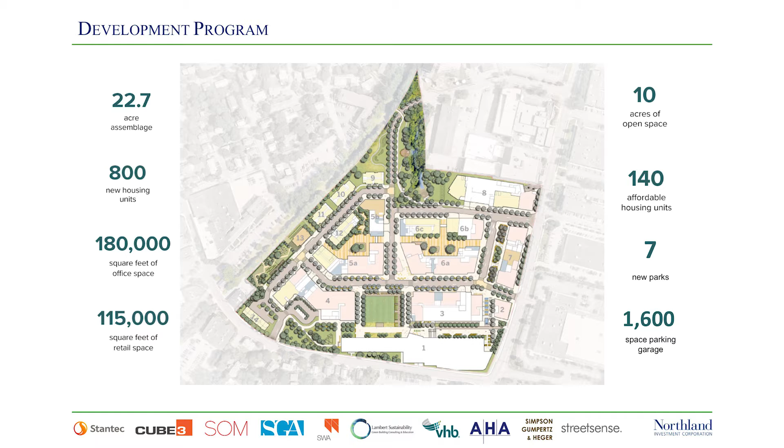And the project is about 35.2 units per acre, which makes it the 6th or 7th most dense project in Newton—a concern, but it's really not even the densest project in Newton.

Of the 22.7 acres, 10 acres or more than 40% of the site is open space. There are 7 parks, including the Village Green.

There's a community splash park and community playground here. This was going to be a community building, but at the last moment of negotiations, the city didn't want a community building—they wanted the splash park and then a neighborhood park. So we didn't argue.

And this area represents a restoration of the South Meadow Brook, which is exposed. It's actually encased in a culvert as it comes through the site and goes underneath the Saco Pettee Mill here. One of the things—I don't know if you can notice—but the Saco Pettee Mill will have a new entry, a glass-enclosed entry here off of the village green.

We're only providing one parking space per apartment unit, whether it's a studio, a 1-bedroom, a 2-bedroom, or a 3-bedroom, which in this market is unheard of.

So here's the real focus of today's discussion: our sustainable design strategies, of which building electrification is really only part. The very nature of the project—a mixed-use, walkable, village-oriented residential, retail, and office neighborhood—is really the overriding sustainability strategy we pursued.

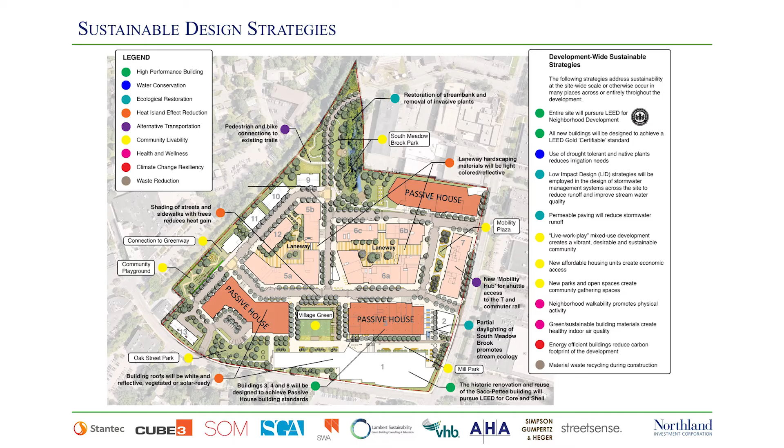These are the smaller, more traditional townhouse-type projects. You can see here the Passive House buildings in the darker color, and this is the core group of the additional 5 buildings being analyzed. All of our buildings will either be Passive House certified, LEED for Homes multifamily certifiable, or both. 3 members of our team have become Passive House certified, and 1 more is taking her training next month. We expect more to follow.

So this is a view of what the project will look like when it's completed, if we get approved—the Saco Pettee Mill, the Village Green. This is one of our Passive House buildings, this is another Passive House building, and this is another Passive House building. And this is really the cluster of 5 buildings that are being analyzed right now.

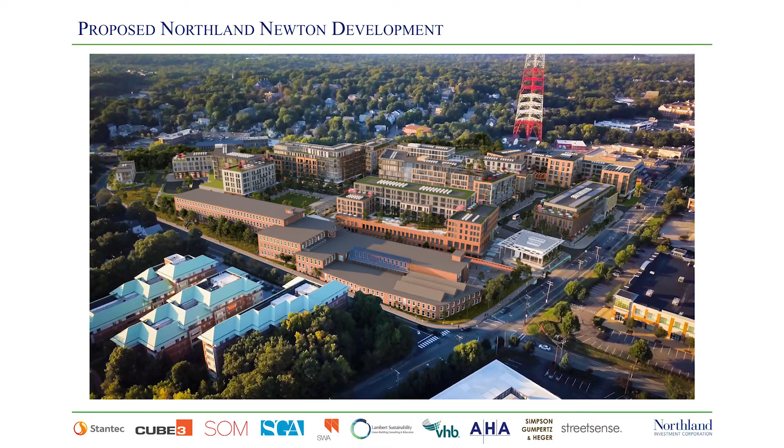So now I just want to summarize what we see as the challenges. Not barriers, but just challenges that we all need to be aware of. Some of them have been discussed today, so I'll try to do it in negative minutes here since I'm out of time.

Rapidly evolving green building systems. There's so many systems, it'd be nice if they could be coordinated, particularly with the energy code. There are two different Passive House systems that argue with each other. LEED is constantly evolving. There's LEED for new construction, LEED for multifamily high-rise, mid-rise, and they're even thinking of changing that. There's the energy code, and now local ordinances trying to legislate green building standards, but not all of them are as reasonable and well thought out as Brookline's.

Experience and expertise. This has been talked about a lot. We simply need more experience and expertise in design and construction. There's just not a lot of people doing this. There are only two contractors that we're aware of with direct experience at the scale we're dealing with for Passive House, and only one of them has done a market rate project. Mass Save, however, has launched programs to help alleviate these shortages with multiple training programs and in some cases funding assistance.

Now, here's the bad word: gas. So far at the scale we're developing, we just can't find a feasible electric solution for domestic hot water. So what we need to try to do somehow is find a way to future-proof our buildings so that when electric becomes feasible, we can then convert. But again, it's still open territory. How do you prepare for that?

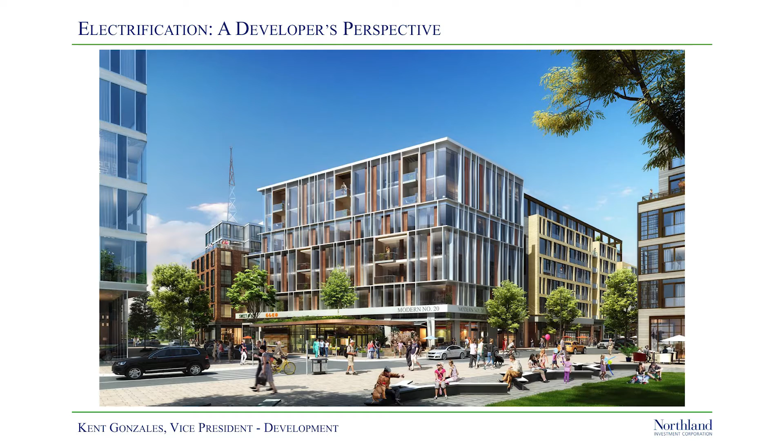So since I've been told to stop about four times, I'll conclude by saying: from our perspective, the path to electrification is the path to take, but with our eyes and our team's eyes wide open on how we can really effectively and feasibly do it. But we are committed. So thank you very much, and sorry for taking too much time.

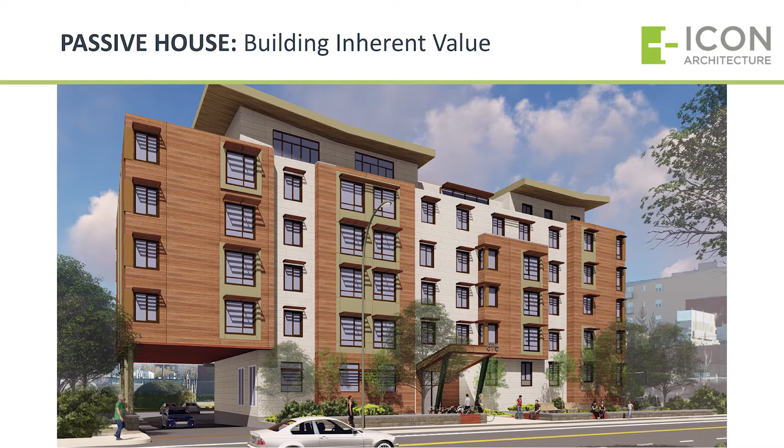I want to talk about Passive House, from my perspective and the perspective of many, as the perfect baseline for future electrification and for net zero. I'm not going to delve deep into the standard—I think I'm talking to a very experienced audience. So my goal today is to talk about how you actually execute it, because it's one thing to design it and another thing to get it built.

This is a picture of FINCH in Cambridge. This is where it was probably two months ago. It's well under construction, getting ready to be occupied in April—98 units of affordable housing, intended to be Passive House certified, pending blower door testing in a few weeks.

There have been a lot of reasons lately why Passive House has been moving quickly in Massachusetts, and they're all very exciting on the incentive side of the equation. Thank you to Mass CEC, if you're in the audience, for focusing on the affordable housing equation, and thank you to the EEA and the Mass Save program for bringing out these incentives at the end of last year. We are seeing a surge of folks looking to understand whether it's feasible and to at least take that first step of a feasibility study. And frankly, that's kind of a no-brainer from my perspective. There are lots of policy shifts moving us in the right direction—not quickly enough.

This is what our energy model tells us we are going to achieve at FINCH. It obviously has some assumptions baked in, a lot of those are in the design. How much insulation do we have? What are the U values of our walls, windows, et cetera? What's the occupancy? All of that data. Those are things we've baked into the design. Some assumptions always on plug loads and hot water usage.

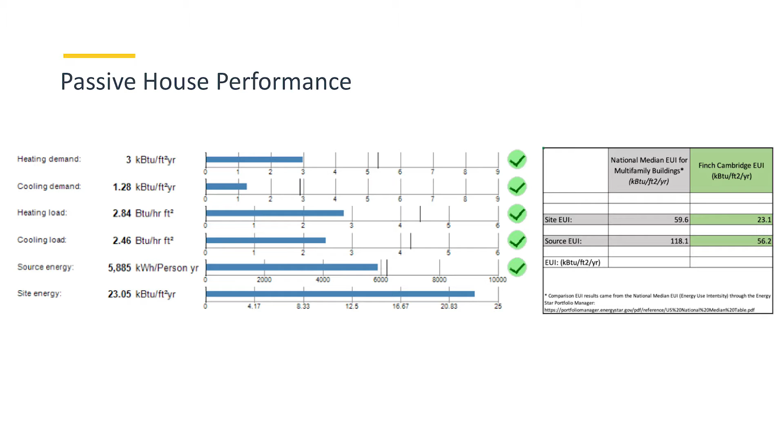The one thing that's also intended and assumed in the model is a certain infiltration rate, and that's the one thing we know we have to test for to verify that we've executed properly. And that's really where I want to focus our conversation today.

In my view, the building industry is in a crisis in this country, and we are not attracting talent. We are not attracting young people into the trades because they don't see it as a path toward a strong future. And that is a true mistake, because it is so much fun.

We all started with Legos, so everyone knows building is fun, and it's so flexible. And truthfully, I don't look at climate change as a crisis. I look at it as an amazing opportunity to single-handedly solve multiple problems, from social equity problems to climate justice problems to our environmental crises, and ultimately to help us lift one another up and solve this crisis together so that we rethink how society is functioning. And I think the building trade is a huge piece of that equation.

So what did we do with a builder who had never designed or built a Passive House before? Because as was mentioned, there are only a handful in the state who have done so. One of those was on our first Passive House project, the distillery. And a lot of the ones who build at scale are really new to this, so there is a learning curve. We have every ability to do it, but we have to think about how we communicate and how we collaborate to make it an effective process.

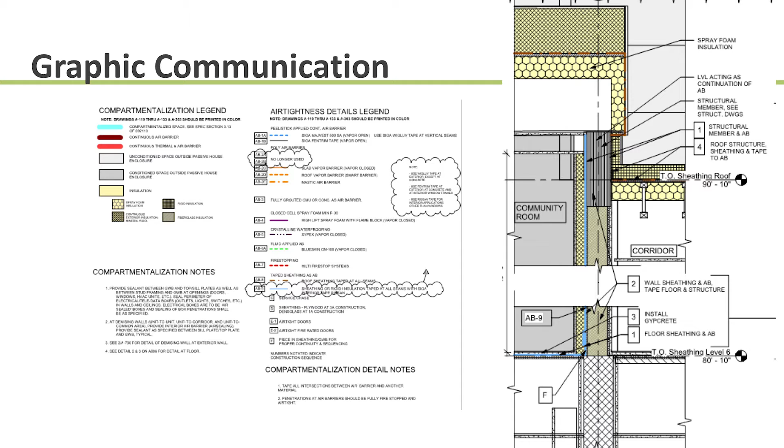We spend a lot of time thinking about the sequence and which thing has to happen first to make sure we can get that continuity of our air barrier, of our thermal envelope. But, you know, for many people looking at this, it's not gonna be crystal clear.

There's another piece of the equation, and that's what happens when you're out in the field and you start to see things coming together. NEI is our contractor, and they have been a phenomenal partner, a true partner. We instituted at the very outset of the project, in addition to that 3-week look ahead that's sort of traditional in a construction process...

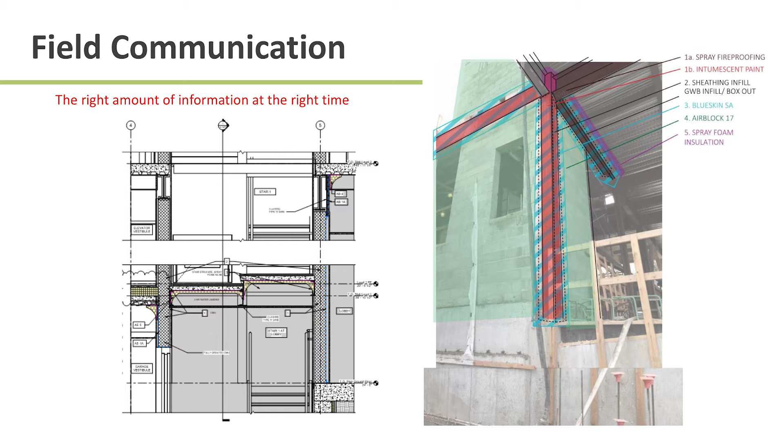...some time in advance of our job meetings where we would look at that look ahead, understand what Passive House specific details were coming down the pipeline in the next few weeks and which trades were going to be involved. We would get those foremen into a room with us and the GC, and we would look at those details.

And it's a humbling experience when people who actually build the details look at the architect's details and say, you can't build that. So it was a true iterative process to reinvent detailing based on what we're seeing in the field, based on the sequence, who's got to get in there first, who's got to get in there second.

I can't figure that out on my own sitting in my office. That's a team effort. We were lucky to have NEI on board during the design phase to help do a lot of that work with us early. But there's nothing like standing out on site and looking at a detail that's two-dimensional in our drawings and way more complicated in reality, and thinking through that process.

Building is a craft. It should be considered a craft. And if we begin to value it again and to treat the laborers and the trades with the respect they deserve to create the future that we're looking for, then we need to bring them into the picture and really acknowledge their value. I think that is a huge mind shift we need to all start bringing into our conversations.

So I made it a point on this project to get to know the name of all the key foremen and all the key people who were involved in the things that actually make this a passive house. This is Caio's team on the carpentry side installing our air barrier.

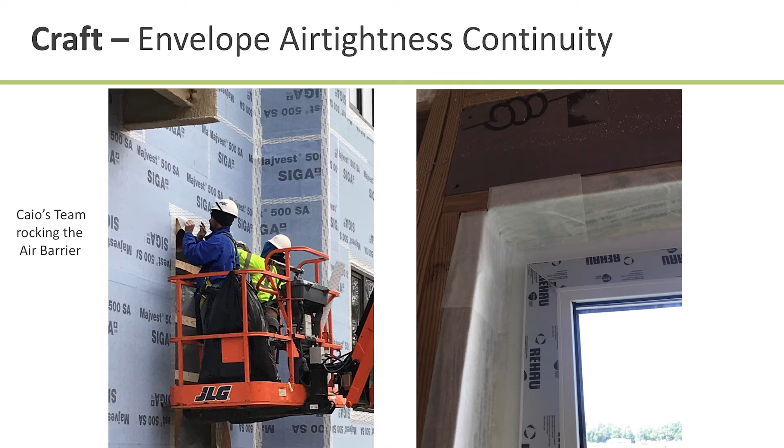We do mock-ups for window mock-ups and general mock-ups on all of our projects to make sure everyone understands how the details are going to be executed. An air barrier is not that hard to install on a flat surface with tape. It's a lot harder to install at the windows, at the doors, at the transitions. So our whole team, including our verifier, our QA/QC folks, our commissioning, our envelope agent, sat for several hours as we watched Caio's team installing that first window.

It was painful. It was not easy. It took a lot of time. And in the end, our verifier took us aside and said, Michelle, if this is what it's going to take on every window in this 98-unit building, you're never going to get there. You're never going to get it in time, and it's not going to be the quality you need.

So this is the air barrier we're using. This is not the air barrier we started with. I think it's really important to see it in process, and I can tell you that they love this product, and they are feeling really excited about how excited we are.

We also have to have our eyes on things. Different teams come on and don't necessarily get the benefit of the chain of communication that happened prior to their arrival. So we can clearly see there's a little too much air there on our exterior wall for an airtight envelope, not to mention insulation issues. So you've got to kind of keep on that.

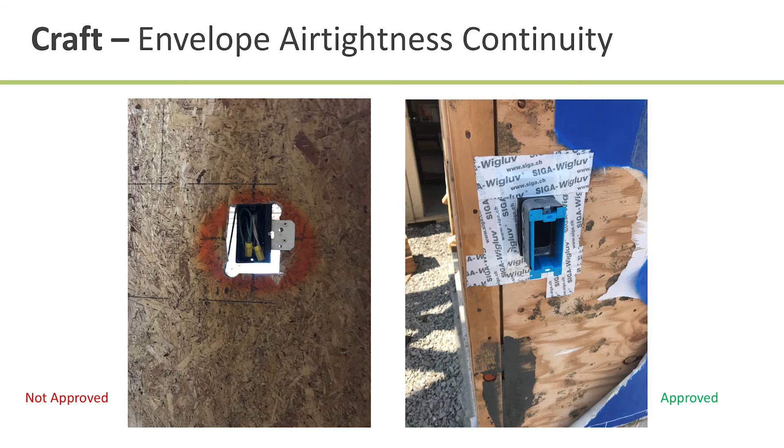Similarly, our QA/QC team was very focused on our insulation, making sure it's not pinched and it's really filling the cavity, and we're getting, again, the continuity that we're looking for.

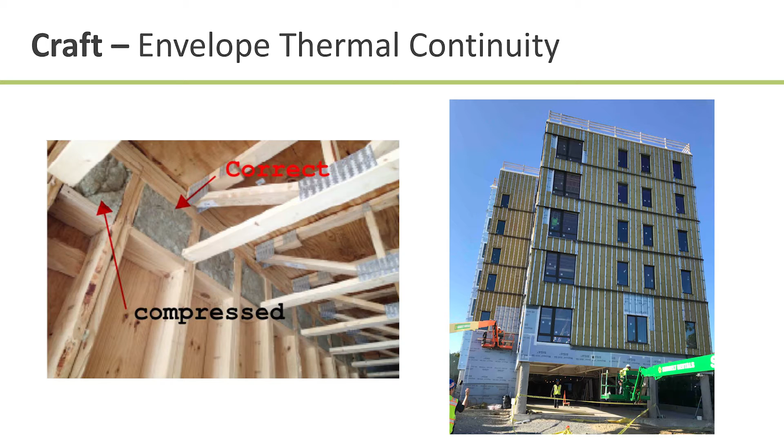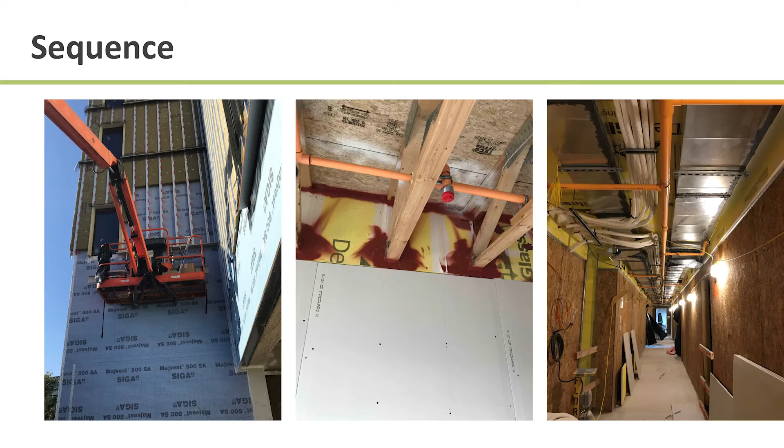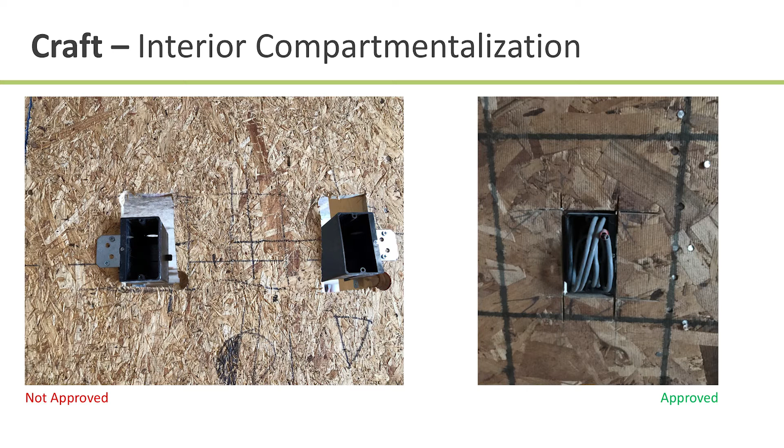Sequence matters. It's really, really important, and it gets way more complicated than we sometimes realize in our office. So it's important to talk through that. And just to note that airtightness is not just about the exterior envelope. It's also about compartmentalization, particularly in a multifamily setting. So different trades, working on the inside versus the outside, didn't get the memo. We had to have the same learning curve a couple of times.

This is Ian. Ian was responsible for making sure that all of our penetrations in the slab over our totally unheated garage were airtight. We can see that the first try was not optimal, but Ian is a quick learner, and all he needed was to be shown how to do it right, and he was able to execute that beautifully.

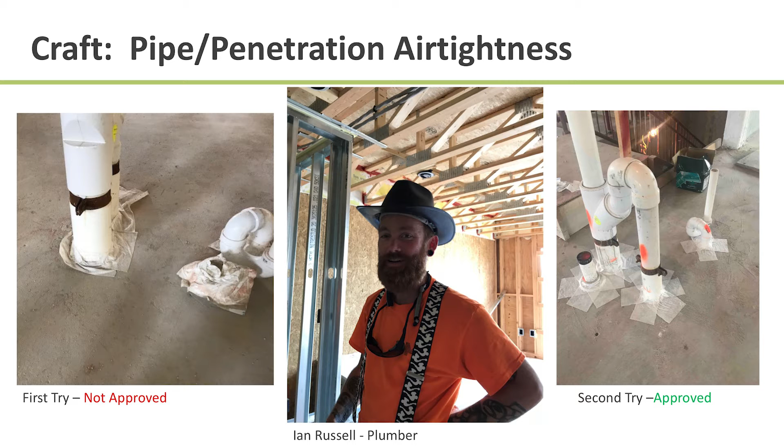Same thing with the insulation. How are we insulating around that? You've got to think through this. What's going on around the fireproofing? What's going on in these gaps?

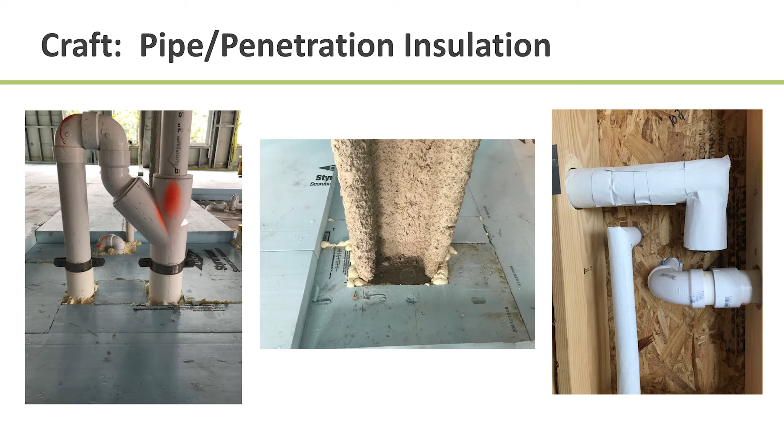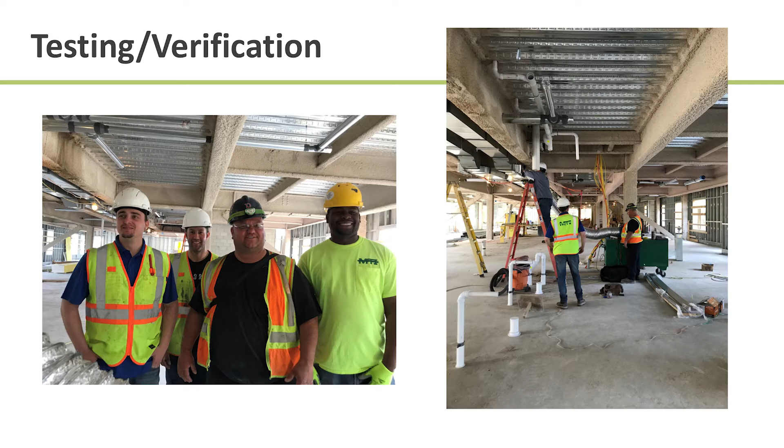That's Eric's team. He is in charge of the MEP and all of the duct work that's going in. Eric doesn't need to know about passive house. He just needs to know that his duct work needs to be tight. That's his job, and that's what we're expecting him to do. So it doesn't have to be a complicated conversation. It just needs to be clear about our expectations and the fact that we're going to be testing to help catch problems early and support him in achieving what we're looking for.

Always great to see that it does make a difference. This is from the inside without continuous insulation on the outside, and now with continuous insulation.

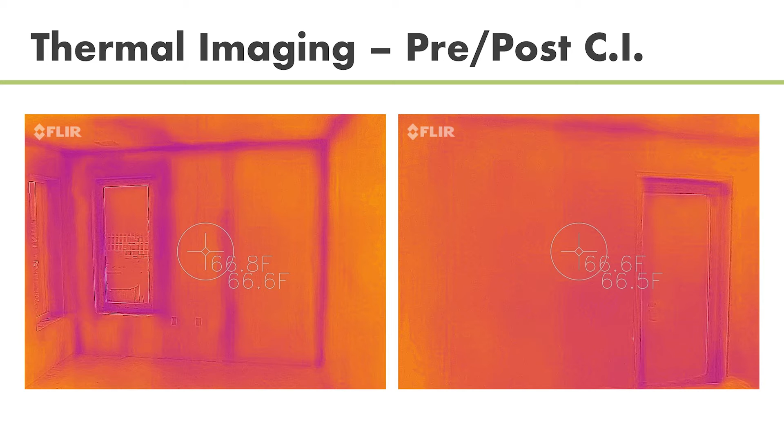And finally, it's just really important to note that this is a team effort. It really, really is. It's certainly changed a lot in the time since I began working in this field. And those teams take a lot of expertise and a lot of collaboration. So no one is alone in this process if we really look at ourselves as collaborators and consider, again, the craft of building. Thanks.

And now I'm going to introduce Jacob Knowles. Geez, I have to go after the Passive House project. You're not going to like this next one.

So you can see there's a lot more glass on this building. This building has a long history. It started many years ago when KPMB, the architect on the job, won a competition to work for BU, and it was at the president's level where they were inspired by this iconic architecture that was going to be a beacon for the future of BU's computational and data sciences program. And so from the very beginning, this was a glass building, and that was non-negotiable.

The project then went on hold awaiting fundraising efforts and internal approval process within the university. And when it came back to life, BU had really transformed from maybe a little bit more of a laggard in the climate action front to a truly inspiring institution that has made huge headway, including entering into a long-term power purchase agreement with a wind farm developer in South Dakota.

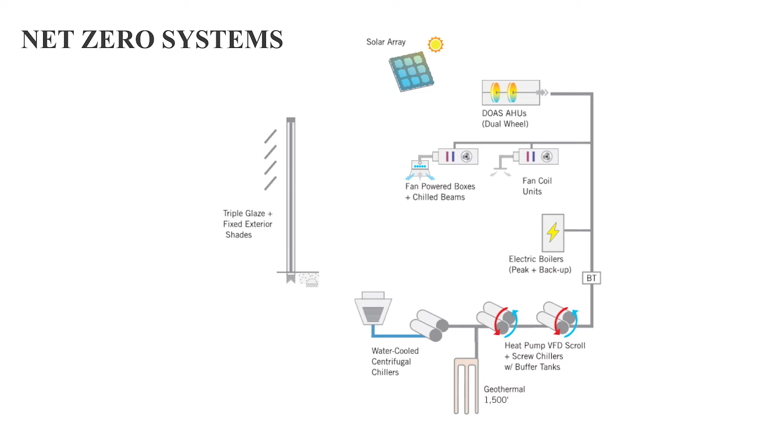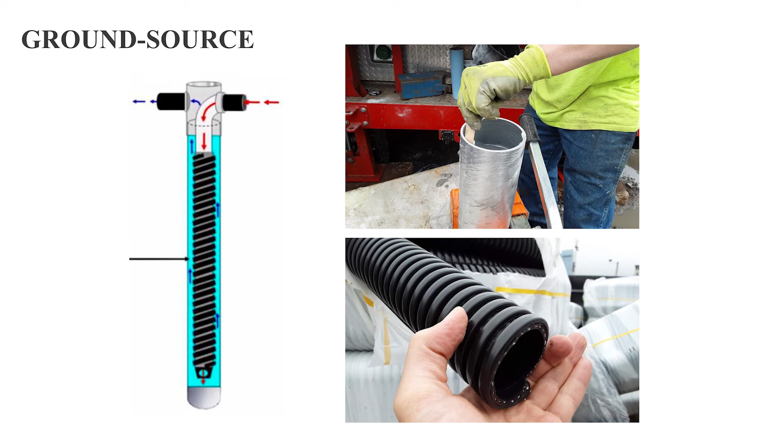So in this case, we're not going down 500 feet with our geothermal boreholes. We're going down 1,500 feet, so 3 times as deep. And we're using a proprietary concentric pipe product rather than the typical U-bend. This sends the water down inside of the inner pipe, which is insulated, and then sends it back up the outer pipe, which is then conductive to the ground. So you get even better performance out of this system than a conventional one, and it can handle that pressure of that deeper borehole.

The reason why we went so deep is because we needed to engage with the ground to have enough heat exchange, rejecting heat in the summer, pulling it back out in the winter to heat the building with our heat pumps, rather than using fossil fuels. The reason we had to go so deep is because we had very limited space to work with, and we still needed a large amount of mass of rock to engage with. There's just a small alleyway behind the building and a pocket park, and we actually put 3 of the boreholes beneath the footprint of the building itself. So in all, we have 31 boreholes at 1,500 feet deep each.

So this is all projected energy performance. The building broke ground in December, so obviously we'll have to see how it performs in the real world. But a conventional design, you can see code minimum at the time this was permitted is on the left. Our proposed design, which again, if one reduced the window to wall ratio, you could get even better.

They're also installing solar on campus. A portion of that solar will be allocated to this building. That gets us down to the green bar. And then with the South Dakota wind energy offset, that's how we're getting to carbon neutral. And there is no gas connection to this building. There will not be any gas consumption.

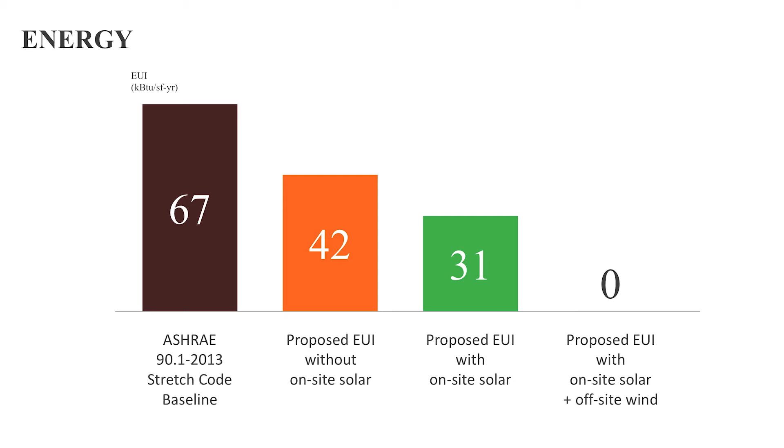And what did it cost? It cost less than 1% construction cost premium. As I mentioned before, smaller systems, smarter systems, saving on space—you add up those two savings and it pays for the geothermal, which is the one major cost premium. Overall, roughly balancing out. This was one of the projects used as a case study in the USGBC Massachusetts, now Built Environment Plus, report on the cost of getting to net zero, and the payback is less than 2 years. So it meets pretty much anybody's pro forma, even a developer type of pro forma from a cost effectiveness standpoint.

Byggmeister is a residential remodeling firm. We work on existing single-family and small multifamily homes. We don't do any new construction except for the occasional addition. How many people here live in a single-family or a small multifamily 2 or 3 unit building? All right, these 10 minutes are for you.

I was thinking during the presentation at the beginning with Jesse and Lisa, you had talked about the questions you got—what does this mean for me, what does this mean for my home. Byggmeister's based in Newton. I live in Newton. I think our building stock profile is probably fairly similar—we have a lot of existing small single-family, small multifamily housing stock. And that accounts for about a third of our overall emissions in Newton, so we really have to address these buildings.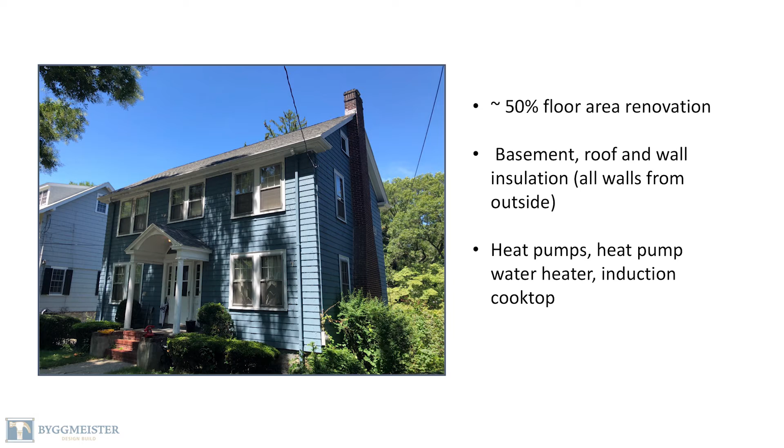This is a house where work is just wrapping up, in Jamaica Plain. The renovation scope would have fallen below that 75% floor area threshold—in fact, all of the projects we did in 2019 would have fallen below that threshold. This was a house that hadn't had work done in decades, so there were a lot of opportunities on both the envelope side as well as on the mechanicals. Old boiler, no central heating, very old hot water heater—so old that our plumber actually took a photo of it. You don't encounter those every day. There were a lot of opportunities.

The project is now nearly what I'd call a near whole house conversion. So we have heat pumps for heating, a heat pump water heater, induction cooking. There is an existing gas dryer that the owners will replace with electric when it finally dies. This project, we considered—there's no cooling. The owners really wanted to add cooling, and that's one of the things that when we're thinking about converting homes can be sort of a trigger, pushes people over the edge. So they're going to do a heating system upgrade and add cooling. From a first cost perspective, once you're there, a ducted heat pump, or a combination of ducted and ductless, is not going to be all that much more. So that really put us over the threshold. Also, the Home MVP program, a pilot energy efficiency program running in parallel to Mass Save right now, provided significant incentives for the conversion to heat pumps that helped make that project possible.

This is a house in Brookline that was completed in 2018. Again, the renovation scope would have fallen below that 75% floor area threshold.

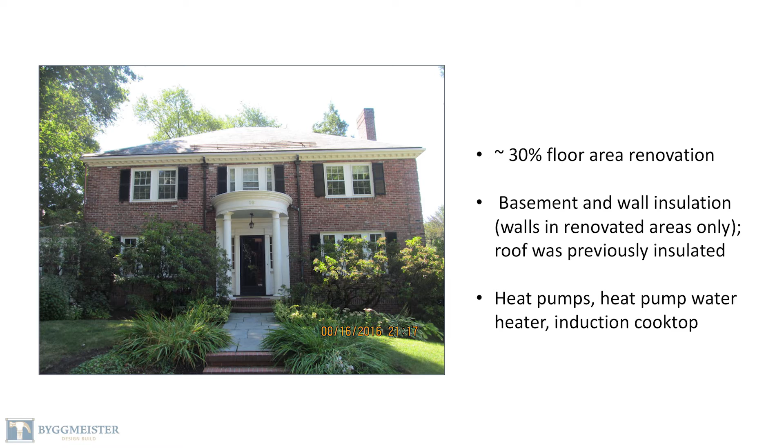This project was going to start off as a partial conversion to heat pumps. There was an existing furnace and central air located in the basement, and comfort complaints, particularly during the summer, on the second floor. So the original plan was to install a ducted heat pump air handler in the attic to serve the second floor, taking that off the existing system.

Then about a month before we were supposed to start, their central air broke. That's what tipped us over, and this is a theme I'll return to: rather than floor area, what triggers all of our conversion projects has to do with the age and efficiency of the existing HVAC equipment, whether it's time to upgrade, or whether there are comfort complaints. Cooling, the lack of it or insufficient cooling, plays a role.

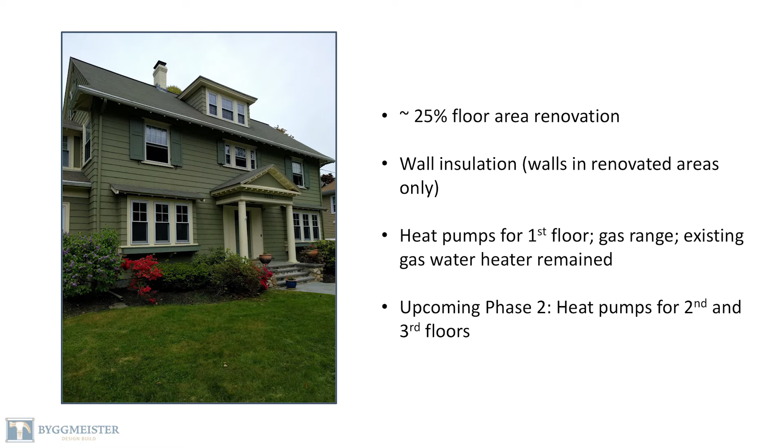This is a final example of a project that just finished up this fall in Newton. We've done a handful of whole house conversions, and the JP project and the Brookline project are two examples of homes that have gone all electric or nearly all electric. But we're doing more of what I'd call partial or phased retrofits, where it makes sense, given the homeowner's priorities and a long-term energy plan for the home, to implement a conversion to heat pumps over time rather than all at once.

For this project, there was a hydronic heating system and central air. Again, there were comfort complaints that the central air, located on the third floor, wasn't serving the first floor well. So as part of this work, we did ductless heat pumps for the first floor. As part of the planning, we discussed that the long-term goal would be to move over to heat pumps eventually, and it's looking like we'll complete that conversion for the second and third floors sometime this year. We did not remove the gas water heater, although we will likely do that as part of the phase 2 heating conversion.

These are very highly motivated homeowners from an energy efficiency and carbon perspective, but they insisted on keeping a gas range. And we do run into that.

This is a special case. This is a 3-generation house, and the grandfather, the parents of the wife, are Chinese, and the grandfather did all the cooking. Before we did this project, he was outside in the winter with his little wok burner setup, so the kitchen was done for him. We had to give him a very professional gas range.

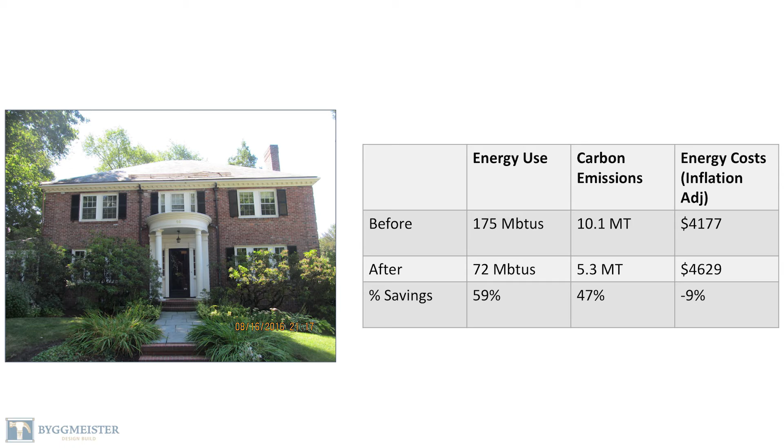Energy costs went up, and Jesse talked about that a little bit, the expectation that whether costs go up depends on what you're comparing things to. But in a retrofit situation, when you're going from gas to all electric, I'd expect costs to increase unless you are at the same time super insulating the house.

Lessons learned: electrification is practical for many more homes than gut rehabilitations, many more retrofits. It's not all or nothing, and in fact phasing the electrification often makes more sense. We're very lucky to work with people who take a long-term stewardship approach to their homes.

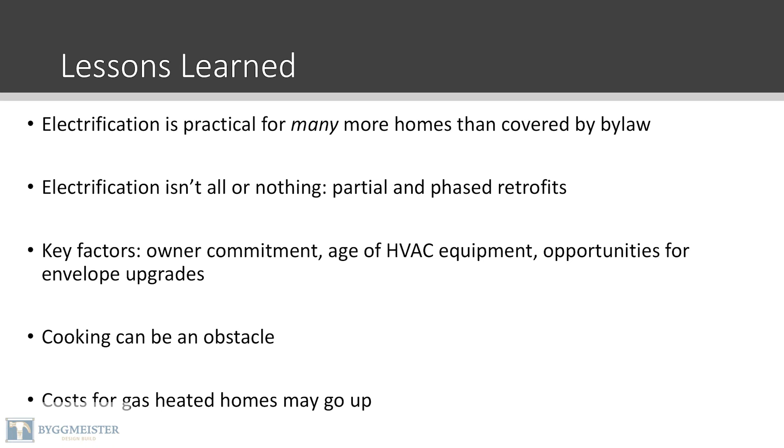Key factors, obviously in the absence of a mandate, are owner commitment. I should add, as I mentioned previously, that incentive programs can be a significant factor as well, as we saw for that project in JP. Also the age of the equipment and whether it's meeting people's comfort expectations. Cooking can be an obstacle, and costs for gas-heated homes may go up.

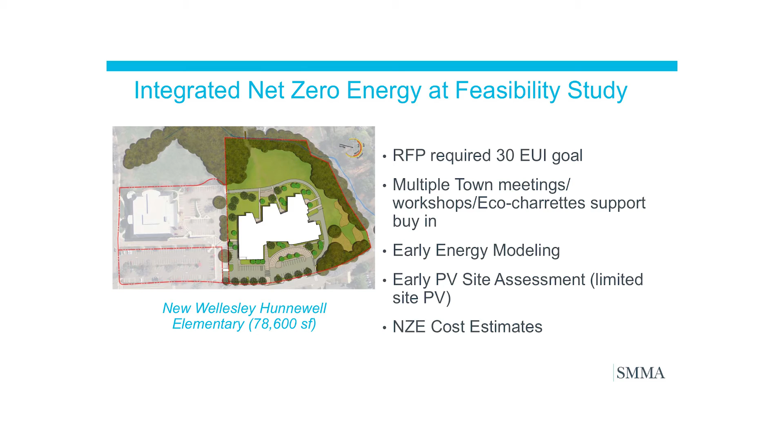From there, we engaged into a feasibility study process that has an educational scope, that has other elements. And the net zero energy was not something that was aside. That was something that was fully parallel to the process.

So town meetings were not specially for net zero. It was the feasibility town meeting that covered all the scopes, including net zero. We held many workshops. We did eco charrettes, which usually in a public school project, we only do a little bit later in the game.

Now, for us to do those net zero schools, we need to do this up front. So this was a precedent, and it set a precedent, actually.

One thing I want to mention is that particular school is not going through the MSBA process. It's going to be fully funded by the town. But the town has another project that's going through MSBA, so this set the template for the other project.

We did also a good amount of analysis, which I'll talk about in a minute. And what I want to mention is we partnered with Bill Maclay, Maclay Architects. Some of you may know Bill as an expert with net zero energy. Specifically, he brought his expertise for the financial analysis.

We did our own energy modeling, and it really provided a great complementary expertise to the feasibility study. So when you go through a feasibility study, you go through many, many iterations. You can go up to 20 or 30 different design options.

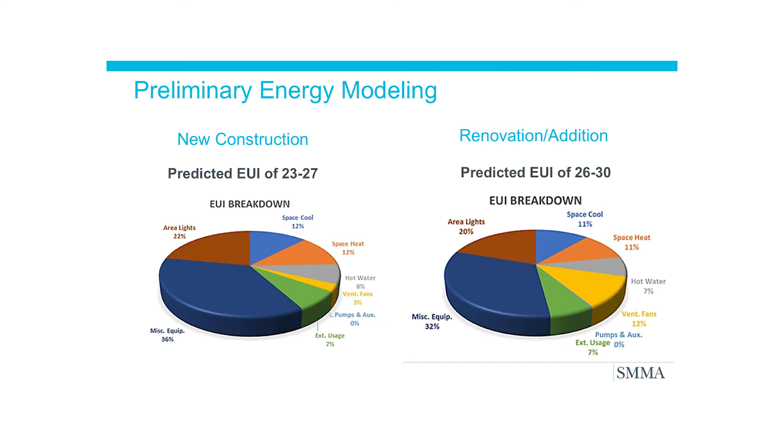We modeled between new construction and renovation addition. We do look at keeping the school if possible. In this case, the majority of the school was in bad shape. There was a small historical part, a small existing part that represented about 15%, where the town considered keeping it. So we modeled both options and both preferred approaches.

Even with the existing building, we were able to stay within and below the 30 EUI. That existing building, we could do retrofit to the roof, retrofit to the glazing. There were some limitations to the enclosure retrofit, which is why there was a little bit of a penalty between the two.

So this shows that ultra low EUI is achievable with these projects. This has a kitchen, a cooking kitchen, gymnasium, all the elements of a public school.

And then we went into a little bit more detail. We did really our due diligence because when we transition - and I think we're going to face this in this movement - to an all-electric system, all-electric heating and cooling.

We have generations of building owners, building managers, facilities managers that are used, a little bit like the plumbing and piping discussion that happened earlier, to the systems that are existing now. In some cases, they've experienced air source heat pumps or geothermal heat pumps very narrowly, and in some cases there was older technology that didn't work as well. So there's a lot of education to do there.

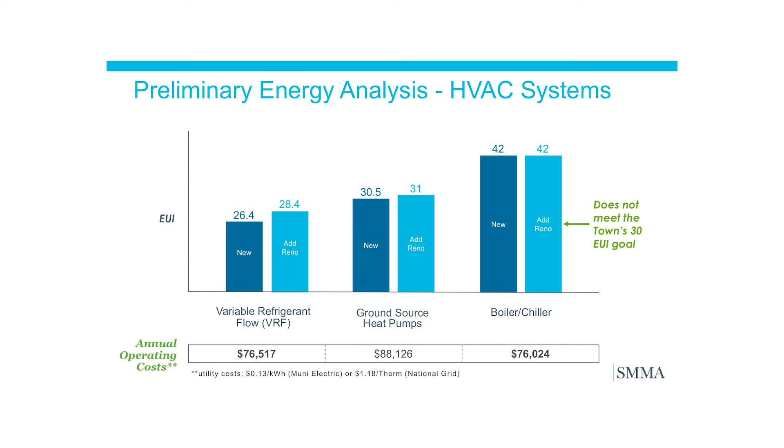So this building is obviously going to improve at many levels operationally. In terms of first cost, this is very early feasibility, but the incremental cost was less than 1% of the construction cost, and the payback was a few years.

Now, the bidding market right now is not on our side, and a lot of projects are coming back much higher, so that 1% could increase. But even if we go to 2 or 3%, we calculated that's still within a 10-year payback, and we're building this building for 50 years. Very doable, I must say.

We're designing a few other projects. I have about 2 minutes left, so I'll quickly show how feasible this is. We're about to start construction on a 165,800 square foot elementary school, net zero, with a 1.4 megawatt photovoltaic system.

And that's happening. Then one other school we did, not net zero, an MSBA LEED V4 Silver school, tight budget in a very economically challenged community. We did MSBA mandated building enclosure commissioning and were able to put in an air infiltration test, similar to what Passive House does, which cost around or less than $10,000.

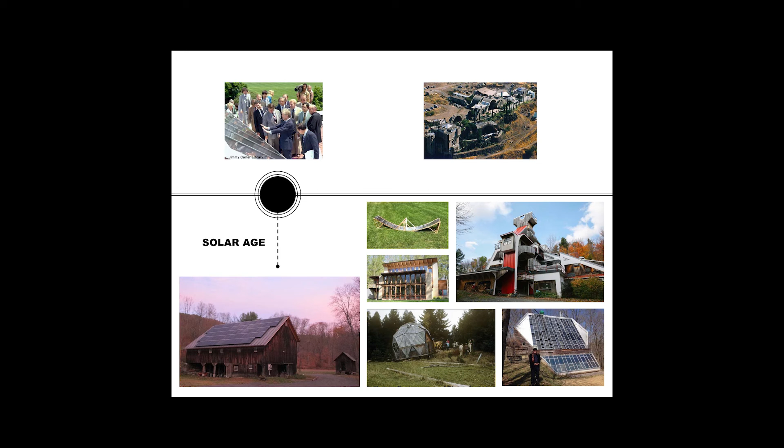People letting it fly, trying all sorts of things to get these buildings going, solar hot dog cooker, and Arcosanti. The stuff up above is aspirational, the stuff below is built things I have some relationship with, just to frame it all.

The lost years included me. There was a decade there where I wandered off and did a whole bunch of stuff. Reagan took the panels off of the White House. I eventually settled down, went to school, and moved to Boston to get an architecture degree.

At 93, I almost moved to Europe to work for a professor, Günter Behnisch, who changed the direction of my life by talking about modern humanistic architectural design at the height of postmodernism, and also relentlessly integrated environmental components and humanistic components into buildings.

So I didn't end up making that leap, but was partially involved in this building here. If you ever want to look at a historic, really green building, the IBN Forestry Institute in Wageningen, Netherlands, 1993, passively ventilated with these Dutch greenhouses.

These greenhouses covered interstitial spaces that were green, untempered winter gardens, providing passive ventilation into the offices. It had a stack effect going, and these gardens were purifying contaminated soils on-site, right within the green gardens.

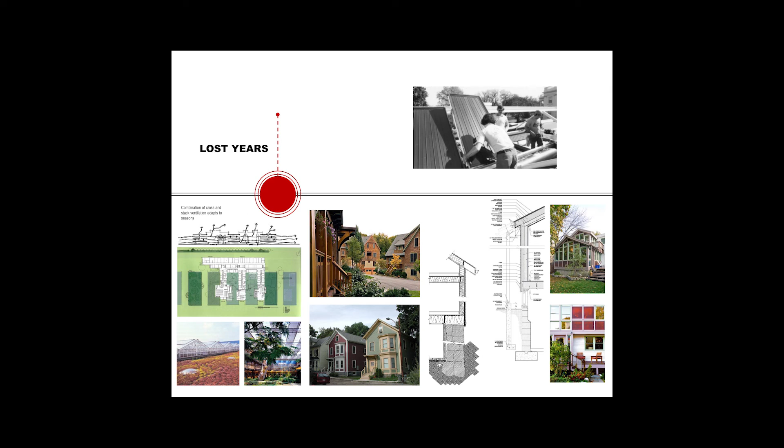It was interesting to be involved in the early transition from Energy Crafted, some people remember, to Energy Star, as far as an energy system for buildings. We did one for Energy Star, and then the Public Health Department in Boston got involved.

We did another one, this is early, probably 2000, that actually worked with public health to have no toxicity and have a different spec while still trying to meet these early energy notions. It was the first building where the transition between the two was a much tighter envelope, and we introduced ventilation.

It was basically better—extreme bath fans coordinated with timers—but it was happening because we knew we were making an envelope so tight that it wouldn't meet these public health criteria.

We went overboard. I don't think Jim is here, but Jim Newman—we worked hard on his house to make it this solar thing. The next round had this double wall, not nearly as much glass, so that was a good science experiment. It was an interesting process.

Energy became much, much more intensive, I would say. So after 2010, a little earlier than that, the Genzyme Center.

Behnisch came back over here. That was a great thing. Reinvented the office, whole different scale.

Very interesting throughout—we reduced the energy 38%, but ultimately the building has zero fossil fuel. It's from waste steam from the power plant next door, so it has steam heating and cooling. A lot of huge daylighting system that was probably over the top, even for the time.

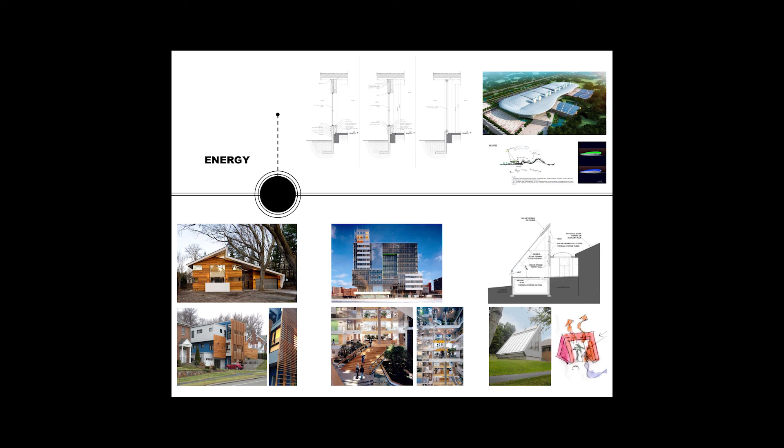In 2012, we did our first all-electric building house. These things were starting to always have exterior insulation, we were tightening up the envelope with triple glazed windows, really beginning to feel like we had the energy to a point where we could do this all electric.

At that point, this house suffered in the winter of 2015. The cold climate heat pumps were on the edge. It had some resistance backup in there, with no fossil fuel backup. They were brave.

The technology has moved, even in 5 years, significantly past where it was at that point, and it was a risk. This is the first zero energy project.

There's a little publicly procured greenhouse for Greenfield Community College, deep energy sort of envelope, only south and east glazing, a lot of work for stack effect and passive ventilation.

Huge array on the roof and back for powering it off. Pretty successful, pretty interesting, especially on public procurement, if anyone's aware of that. But aspirationally, doing some work in Asia that was fashionable—these high-paid competitions for high sustainable buildings.

Also got a very interesting high school project that some people in the room were involved with, which almost got to the finish line for renovating a high school to have 8 different facades so the kids could track the energy use of the different building systems, down in Dighton Rehoboth.

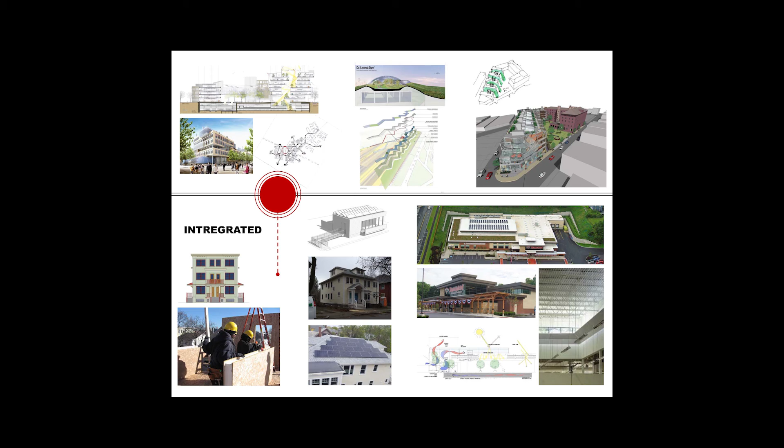And starting to move into the much more typical - a 7 room, 2-family building, recladding it, putting solar on it, putting in all electric systems. So this is 2014, 2015. Even taking a step further back...

...a prototype for Hannaford: low energy, daylit building, LEED Platinum, all electric. We gathered all of the heat rejection in a pretty interesting system - all the cabinets fed by coolant rather than their own compressors. We get all of the space heating, all of the hot water, and a bunch of snow melt, in Augusta, Maine, from the rejection of what they have to run 24/7 for cooling and for the refrigeration system.

No direct light on the lettuce, but we got there through a pretty interesting daylighting system - they reclaimed a mill for their trellis. It was interesting to see. It's an all electric building, 10 years old, cranking along. There is a gas range - probably 3 gas ranges, so I should say that - but the space conditioning is electric. That gas range is a tough one; it's going to be the last thing to go.

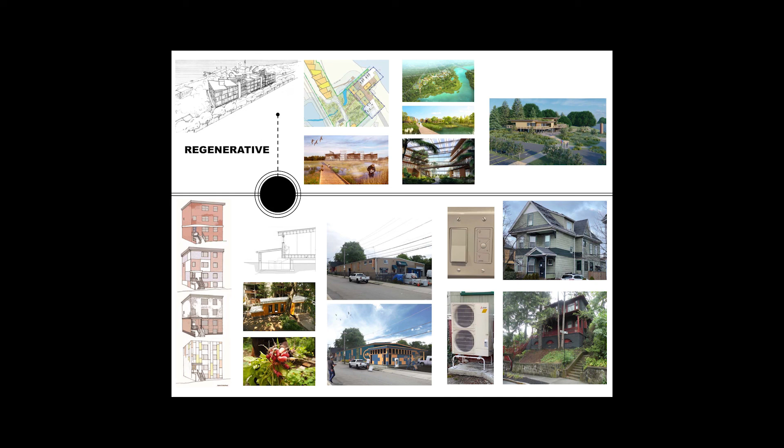And then where we are now, which is very interesting to us, is public housing. DHCD is just incredible - we're recladding buildings, we're doing all electric buildings for DHCD. The Living Building Challenge has come in, which is a pretty cool standard for regenerative design.

This has got mashed, but this is a standard that says the building has to give back more than it takes. It's not just energy, but water, social equity, a whole urban agricultural component, a required recycled building material component, and a toxicity piece to it. So this is 2015, one of the first certified - certainly the first certified in Boston.

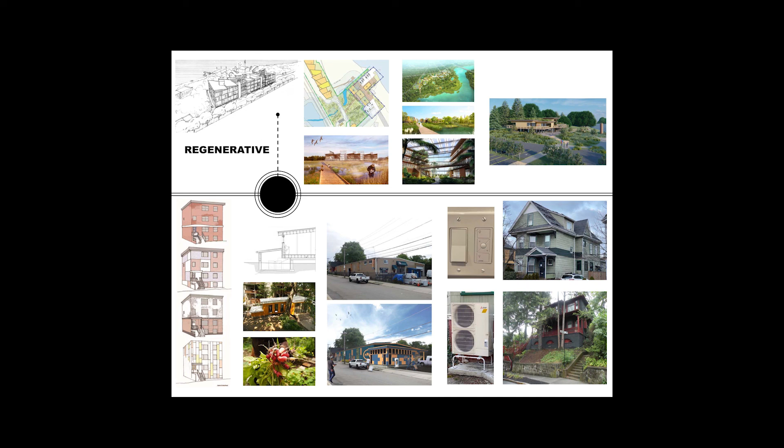And these other aspirational projects going on: Plymouth Academic Campus rumbling to some fitful completion someday. This is Roaring - this is a Living Building Challenge, fully certified building for Audubon. But on some level, more importantly, is here.

Tom and Jen's house down here - it's gone all electric this year, and is painfully restoring a historic building that has ancient windows, redoing them with storm windows, figuring out how to do the air sealing without trashing the historic detail, and is on an arc to get there.

The other part of it is this other one in Somerville, Meredith Elbaum, who's another hardcore case - they've taken a Victorian completely off of gas, induction stoves, doing all of that. And the controls have really gotten very simple - you add a Nest to this, and the controls have become remarkably available for managing one of these. This is in Roxbury.

This is a warehouse retail facility, recladding it, going all electric, has a great roof for solar, will truly be energy neutral or net energy or whatever we want to label it. And these are central urban, pretty humble, standard housing types all over everywhere - some taking a longer arc to deep energy retrofits, some going quicker, but realizing it's just not that big a deal.

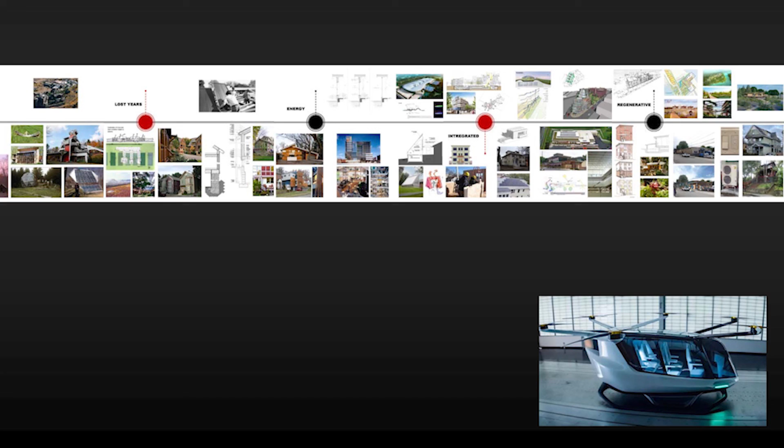And so I think - I know I'm over, but this is being done in Hopkinton: they've got an FAA license application for an autonomous 5-person drone taxi. They say they'll take you for a spin, and we're there - technically it's just not an issue anymore. And that's why I applaud the political part. So there you go.